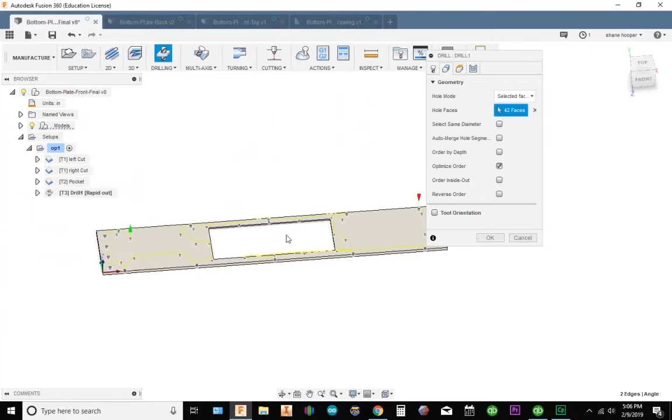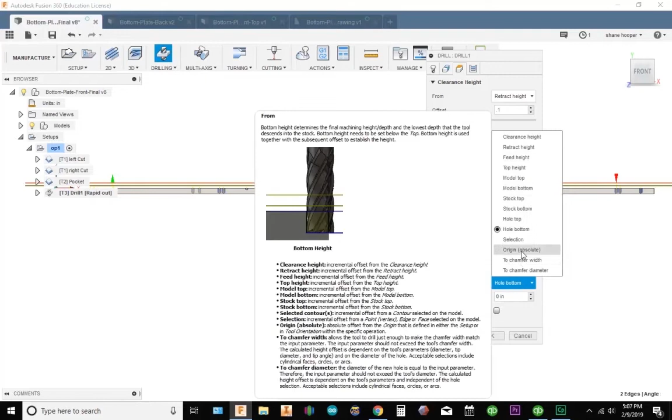Okay, so I have each one of my holes selected. Now I'm going to go to my heights. I'm going to put it in front view so I can actually see what's going on. And my clearance height is going to be 0.1, retract height 0.1, feed height 0.1, top height 0, and my bottom I'm going to put in absolute, and I'm going to go minus 50 thousandths.

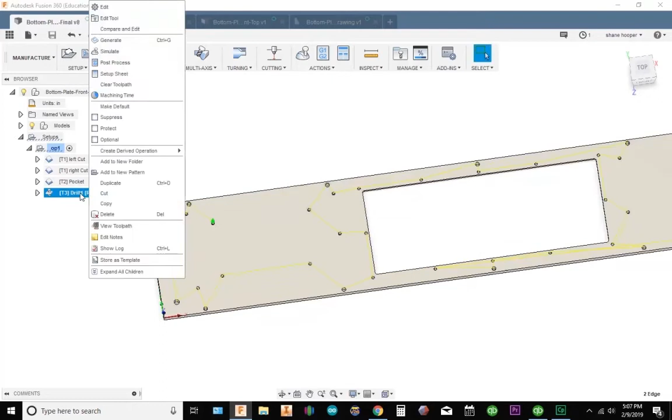Cycle type, drilling is going to be fine. We'll go ahead and hit OK, and I now have something that looks like this. We'll go ahead and save. Alright, so next thing I'm going to do is rename, I'm going to click right here and rename this center drill.

Okay, so since I'm keeping things simple, I have all these holes selected right here. So what I'm going to do is duplicate this toolpath. Let's rename it 98 thousandths drill.

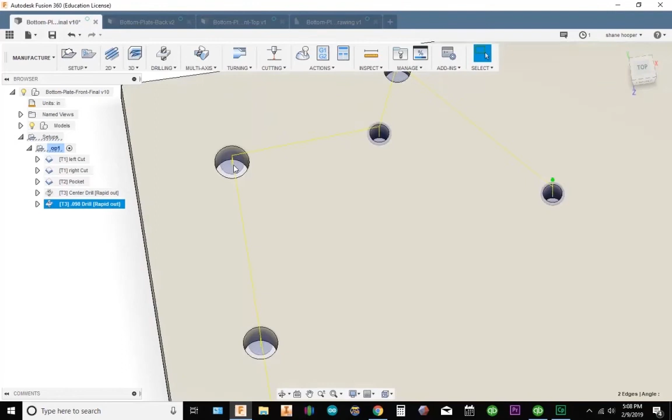Now I can get away with doing it like this because these holes may be bigger, but because I'm drilling at 98 thousandths through each one of these just to keep everything simple, on the drill press, because the hole is already drilled and a typical drill has a 118 degree included angle, that drill is going to follow this hole. Okay, so I won't have any problems with accuracy. This should work out pretty good.

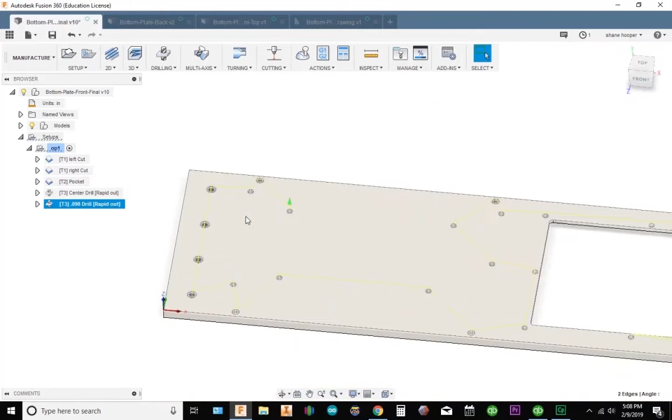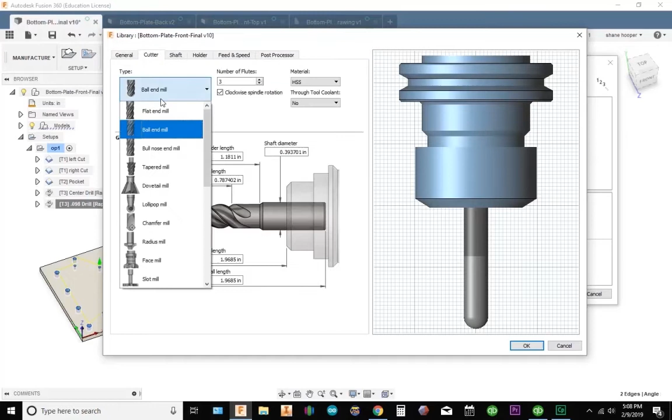Alright, so since I duplicated this, all I have to do is edit the depth and the tool number. So I'm going to go over to my tool. I'm going to create a drill. Let's go to general. 98 thousandths diameter drill. We'll put our cutter on drill, our diameter 98 thousandths. Feed and speed, let's go 1200 RPM. Plunge rate, let's go 4 inches a minute.

I could go faster. A lot of times you'll dial in your speeds and feeds to pretty much reduce the cycle time. But if you're just making one part, sometimes you have to evaluate your situation. Do you want to spend a lot of time playing with speeds and feeds in your settings, or do you just want to get the part done? And if it's just one piece, let's just get the part done.

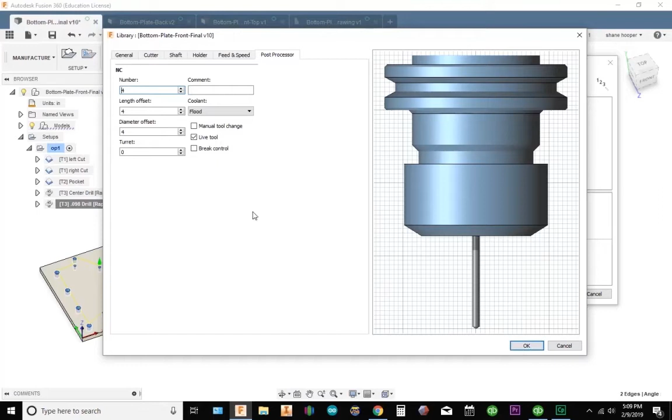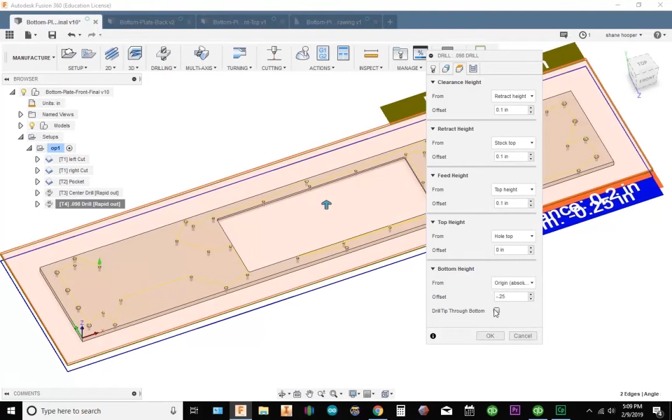Tool number 4. Let's hit OK. Get that selected. Geometry, that's already selected for me. Now the height. Because I duplicated this toolpath, all I have to change is my bottom height. I'm going to make this -0.25 and include the drill tip through. If I zoom in, it's going to look something like this.

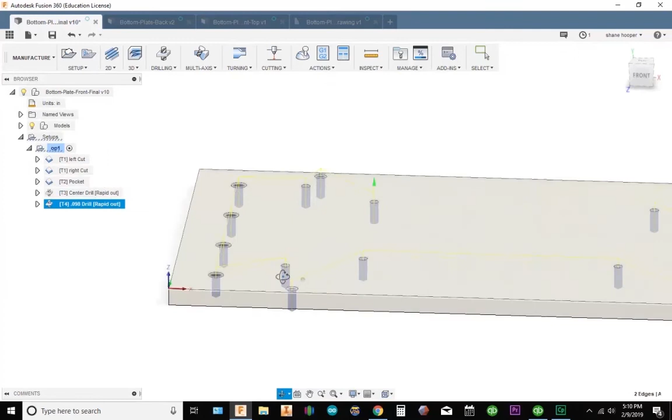Now if you want to, you could peck. These plates are made out of aluminum, and I'm only going 1/4 inch deep, so I don't think there's any real reason to peck. So we're just going to keep it simple. Alright, so everything looks good. I'm going to go ahead and post.

I'm using a Haas TM mill, so I'm going to select milling. Vendor would be Haas, and I'm going to use this pre-NGC Haas post processor. Program name, I'm going to name 0100. I don't bother putting the O in there because when I post it, it'll do that for me.

Okay, so the properties. I'm not going to have a preload tool. Get that checked, no. I'm going to use a G00, and I'm going to use a G28 instead of a G53. That's usually the only settings I use for this machine. Everything else is default. I'll go ahead and name this bottom plate final, and we'll go ahead and post it.

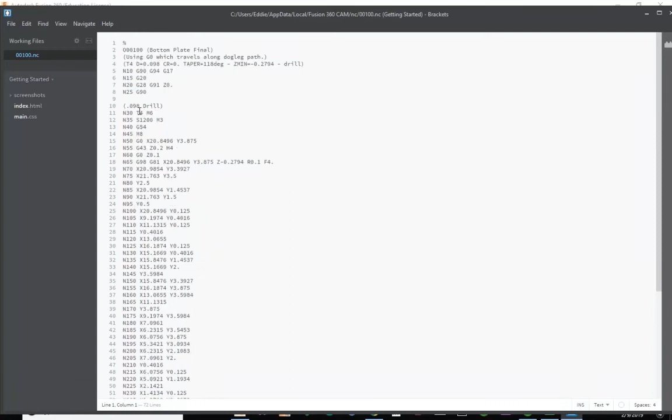Alright, so I'm going to go through here and make sure everything looks right. So right here is starting off with a 98 thousandths drill. So I have a problem. It only posted a 98 thousandths drill. So let's exit out of this. The reason why it did that is because the only toolpath I've highlighted is my 98 thousandths drill. So what I need to do is select my op 1, then go to post. Let's rename this. We'll repost it.

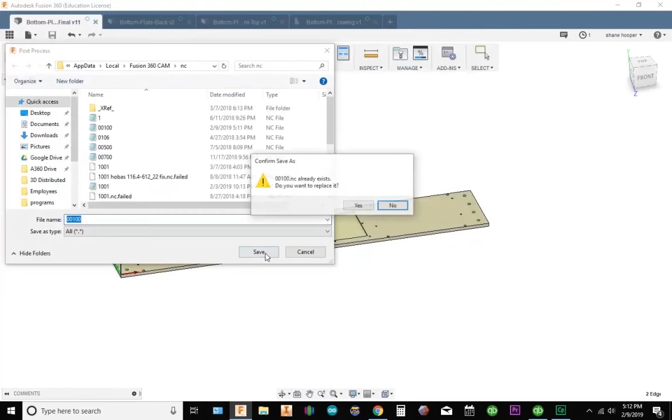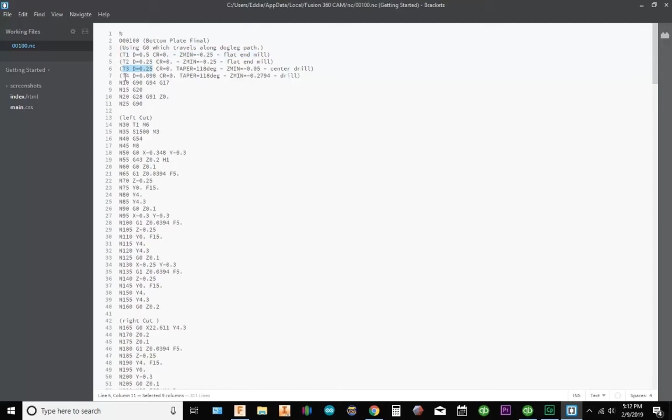Alright, so now if I look at everything, I have my left cut, which uses a 1/2 inch end mill. And as you can see, I have my 1/2 inch end mill as tool 1. Tool 2 is a 1/4 inch end mill. Tool 3 is a center drill with a 1/4 inch body. Tool 4 is my 98 thousandths drill. Everything looks good. We'll go ahead and post this and see how it goes.

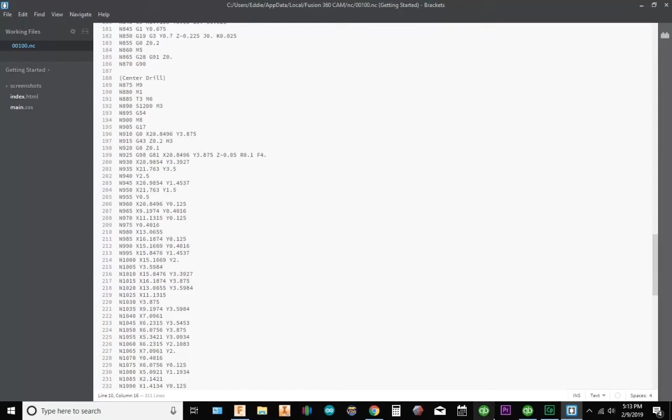Alright guys, so we got our program ready. I made one little mistake. There's gonna be 2 clamps holding it down, one in between these holes right here and one over here. The clamp is 1/2 inch tall, so we need to make sure we clear it.

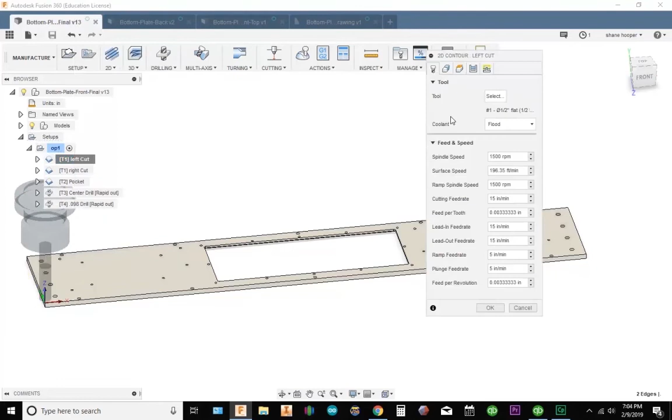So what I'm going to do is go to my left cut. I'm going to right click, go to edit, and go to my heights. Now my clearance height, because the clamp is 0.5 tall, I'm going to enter 0.6.

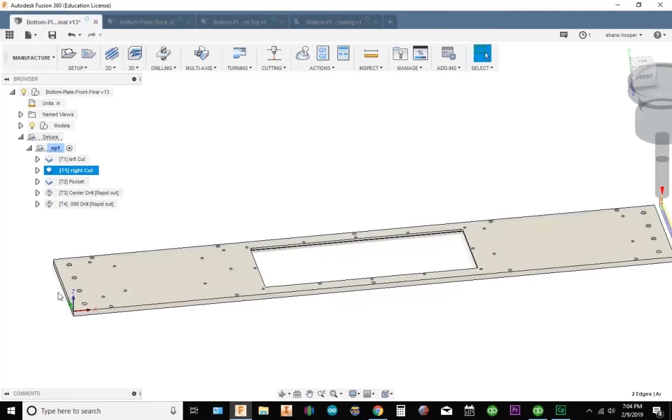Okay, and let's see. I think I'll be alright in the right cut, because basically it's going to come in, do the left cut first, retract to clearance, which is 0.6, move over the clamps and come over to the other side. And this is the last toolpath with this tool, so I should be fine. It should go straight up.

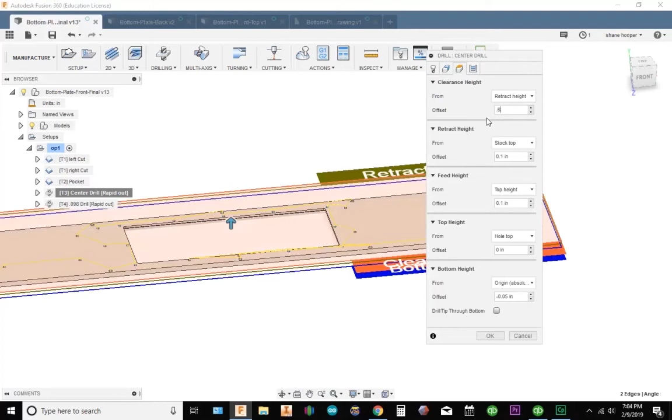So next thing I'm going to do is go to my center drill. I'm going to go to edit, go to my heights, and I'm going to go 0.6 for my clearance and 0.1 on my retract, and we'll go ahead and click OK. So we'll have something that looks like this, and we'll do the same thing with the drill.

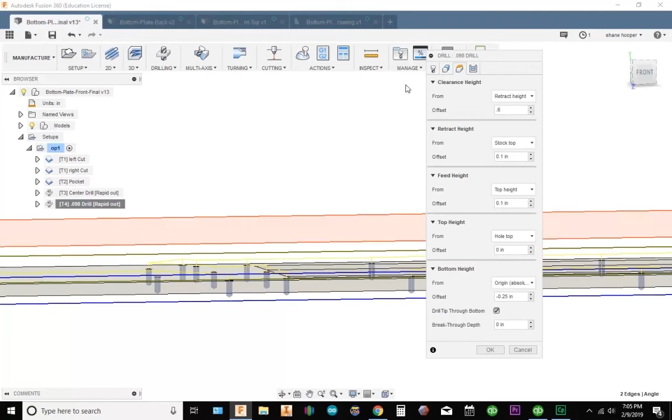Right click, go to edit, go to the height, 0.6, 0.6 for my clearance. So I got something that looks like this. We'll go ahead and hit save.

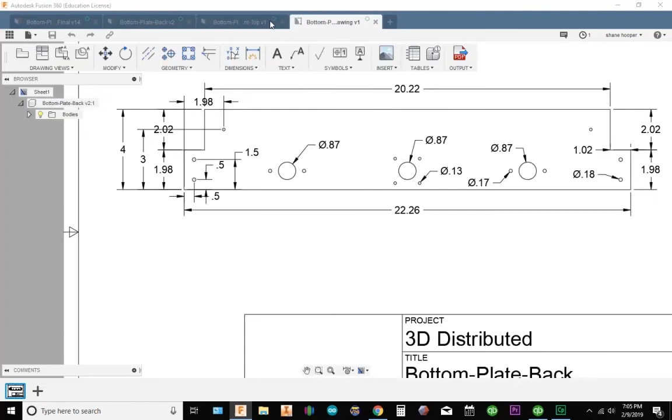Now, because I have a family of parts, I have one that looks like this. It's the same stock material, and it's going to use basically the same tools. And then I have another part that looks like this. This one's a little bit different, but it basically uses the same tools.

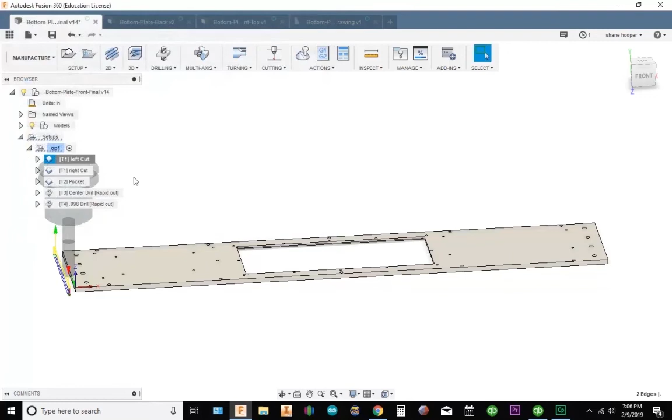Alright, so what I'm going to do is go to my left cut, right click, go store as template, and I'm going to name this left cut. So I now have that toolpath saved. I'm going to go to my right cut and do the same thing, store as template. I'm going to name it.

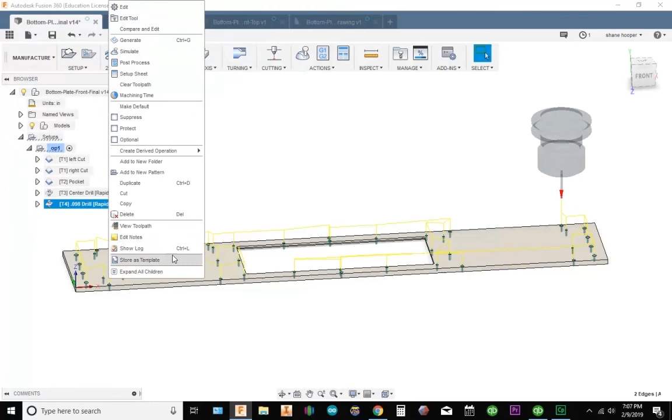I'm going to go to my pocket, store as template. I'm going to go to my center drill, store as template. And I'm going to go to my drill, store as template.

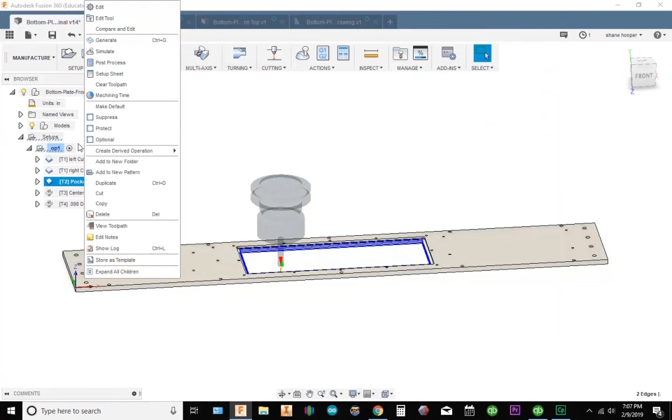Now one thing on the pocket, I want to make sure I can use my tool wear compensation. So let's go ahead and check our settings here. I'm going to right click on it, and let's go to edit. Let's go to passes. Compensation type, let's put it on wear. And let's see what this looks like.

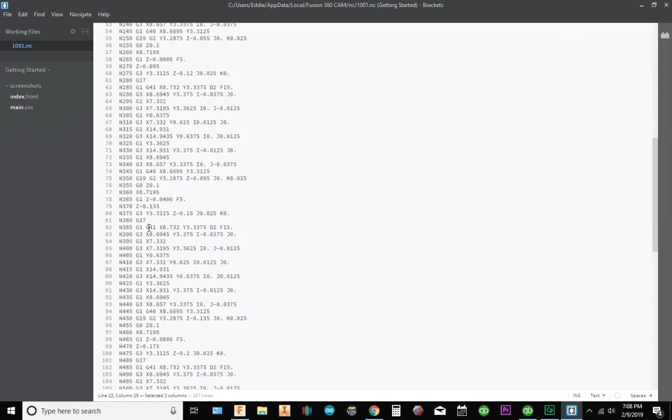Now if I post process this, what you should see is a G41. So it now puts the G41, and because it's tool 2, it's going to have a D compensation D2 in there. So I have a series of G41s. Looks good. We'll go ahead and close that out. Let's resave this as a template. And let's go ahead and save it.

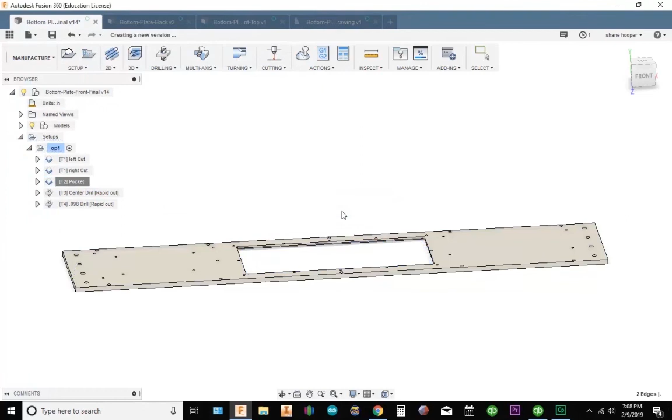Okay, so now I have this part to do, right? So all I should have to do is go to manufacture. We'll go to our setups. We'll do the same thing, stock. I'm just going to put 0. Let's go ahead and get our orientation. So our Z is going to be on top of the part. And our X looks good.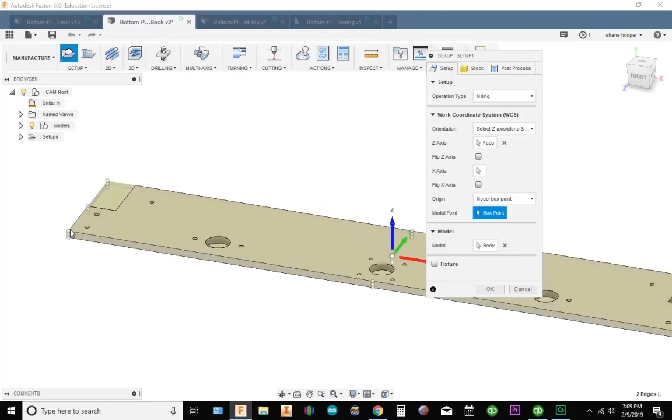Let's set up our stock to model box point, and I'm going to click the same origin location. Looks good. The last program I named 00100, so I'll make this 00101. Hit OK. We'll name this Op1. Let's go ahead and save.

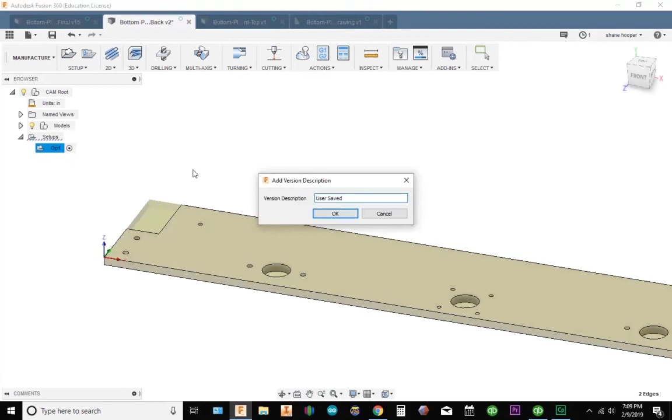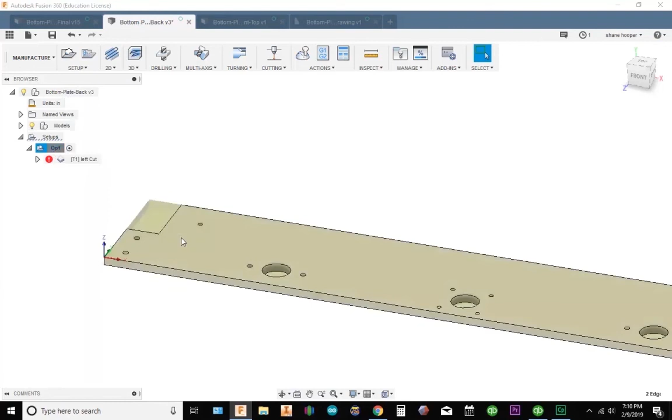Alright, so all I should have to do now is right click here, and I'm going to create from template, and I'm going to do my left cut. Let's bring this down. We're going to load all of these. So I'm going to create from template, right cut, create from template. Let's do our pockets.

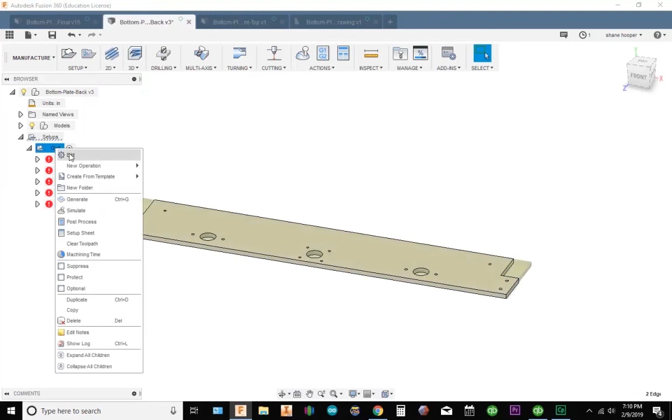Now I'm going to have 3 pockets here. So what we'll do is we'll just duplicate this 3 times. Let's go ahead and add our center drill and our drill.